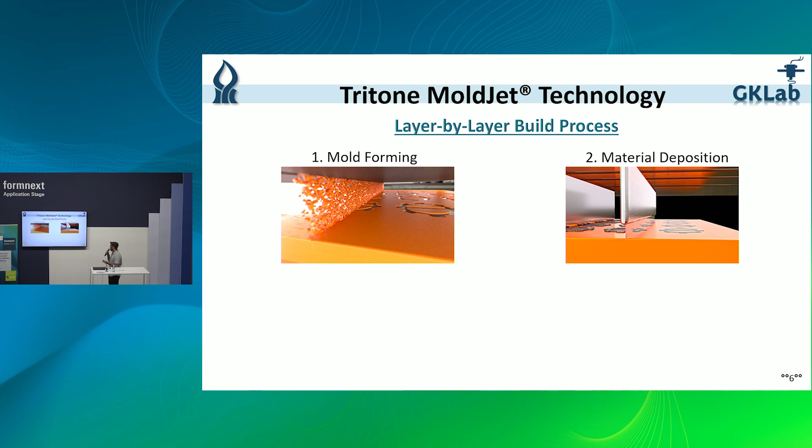Briefly, the layer-by-layer build process includes mold forming, in which a high-resolution print head jets an ultra-thin layer, creating a layer mold. Material deposition, in which a metal paste is applied into the mold cavities. Drying and hardening, in which the build tray goes into a thermal phase, hardening the new layer. And real-time visual inspection, in which a high-resolution camera analyzes the new layer, making sure it conforms to the final model. If it does not, the defective layer is removed, and the system repeats the previous layer without affecting the process. This process repeats layer after layer at an industrial speed.

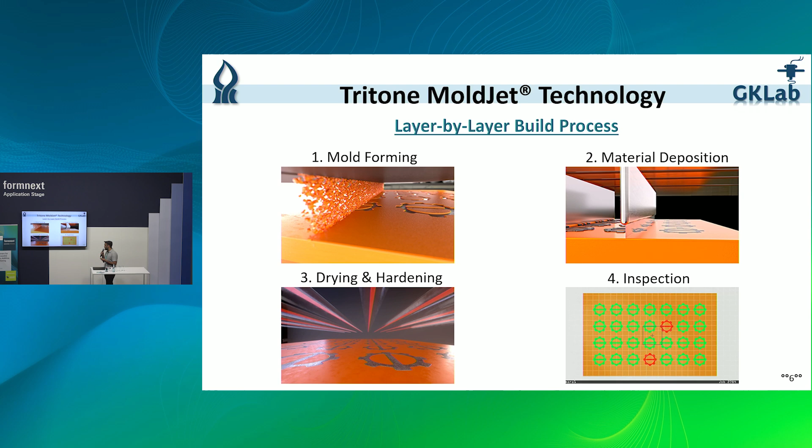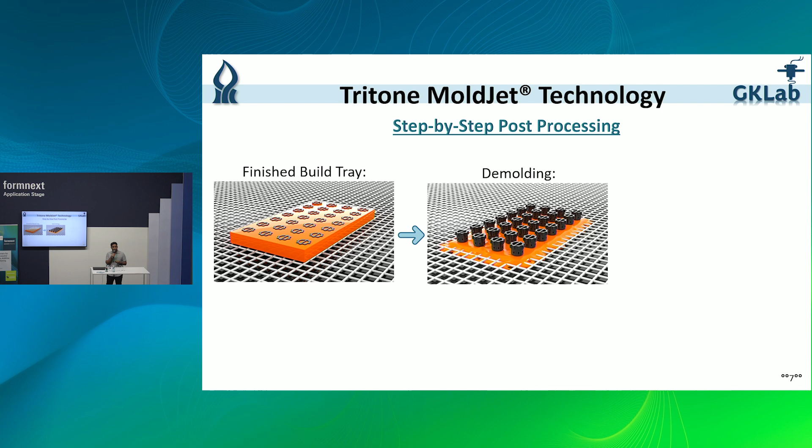After finishing the build process, the finished build trays go into post-processing that includes demolding, using a mold removal solution that chemically dissolves the entire mold material, resulting in clean and robust green parts, and sintering that makes these parts fully functional. For a detailed explanation about the MoldJet technology, you can visit the booth of Tritone at hall number 12.

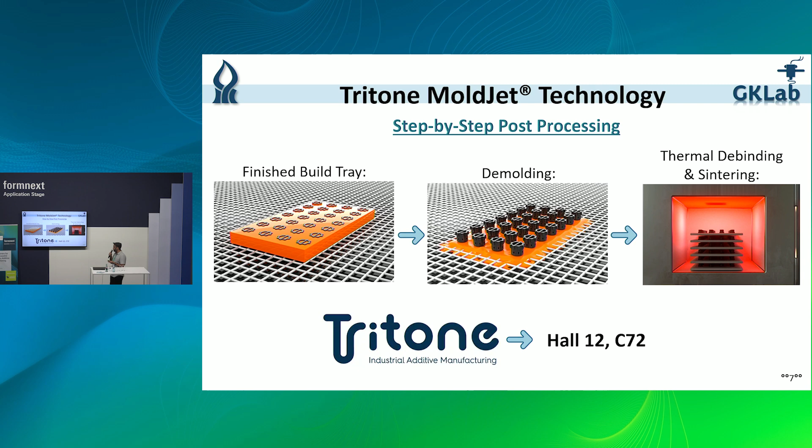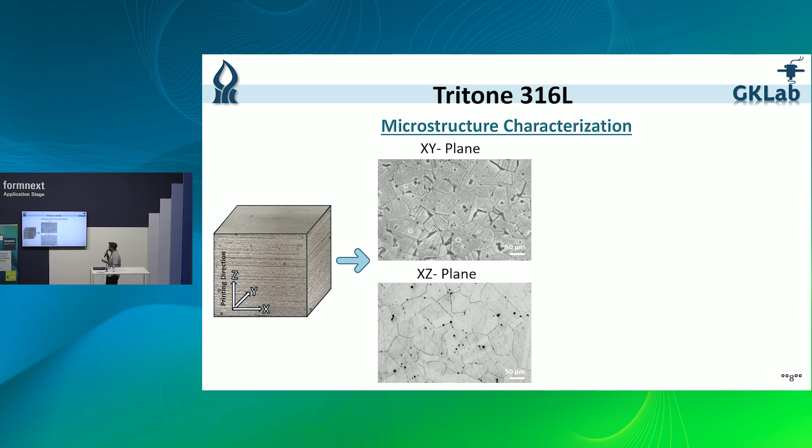The following results were obtained by the characterization of a 316L stainless steel alloy. The microstructural characterization included examination of both the XY and XZ planes of a printed cubic sample in order to examine whether there is dependency on the printing direction. Here we can see microscopic images of these planes that reveal the presence of a primary phase of an austenitic matrix and a secondary phase of ferrite. The presence of these phases is also indicated by an X-ray diffraction analysis of both planes.

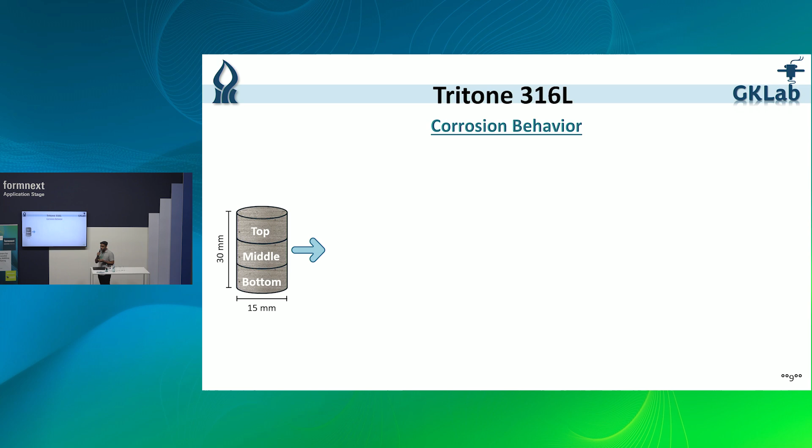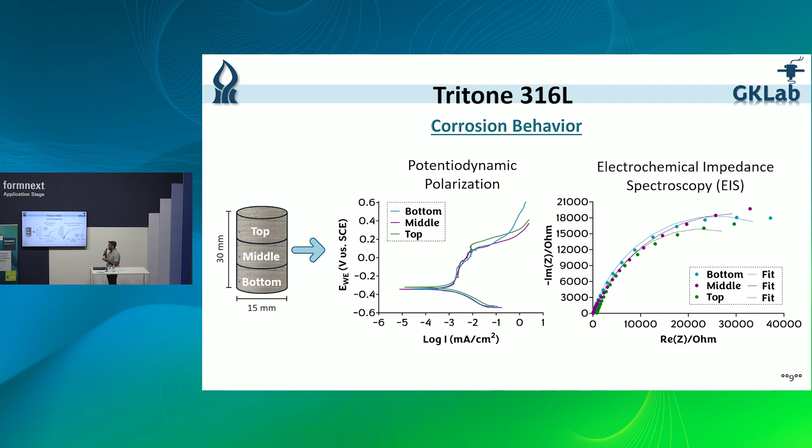As part of the corrosion behavior evaluation, I divided it into 3 areas and examined whether there is consistency between the different areas in terms of corrosion resistance. The tests were conducted in a solution that simulated the physiological environment, PBS. Here we can see the corrosion resistance in terms of potentiodynamic polarization and electrochemical impedance spectroscopy curves. The obtained curves in each plot demonstrate high corrosion resistance and that there are no significant differences between the examined areas.

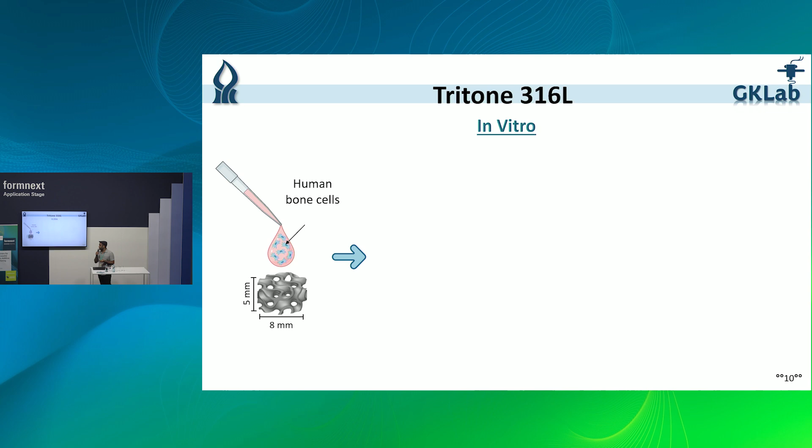The in vitro evaluation included seeding of human bone cells on printed lattice samples followed by incubation for several time periods up to 28 days. At the end of the incubation periods, the bone formation was evaluated using fluorescent staining. Here we can see microscopic images of lattice samples that were incubated for 14 and 21 days. The blue DAPI staining, which represents the cell nuclei, indicates the cells' attachment to the surface of the samples.

The red staining, which represents the calcium deposition, demonstrates how the seeded bone cells deposit calcium and other minerals to initiate the bone tissue. These images indicate cell proliferation and bone formation on the surface of the samples as time progresses, thus proving the samples' biocompatibility.

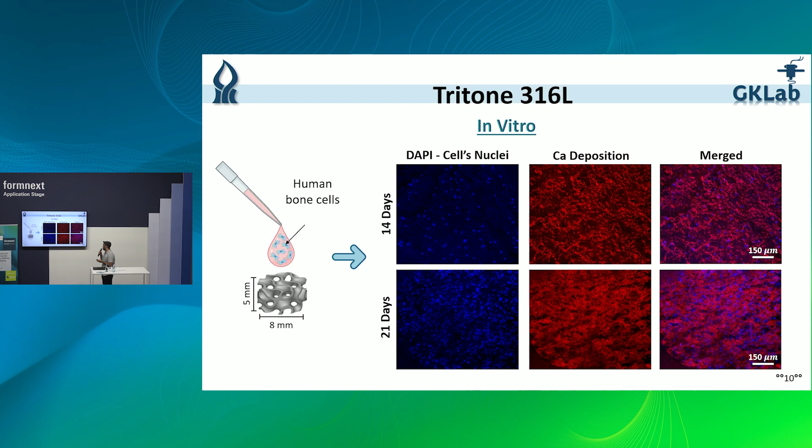In summary, the obtained results demonstrate the isotropy of the examined samples, and their potential to be used as bone reconstruction implants due to their corrosion resistance and biocompatibility.

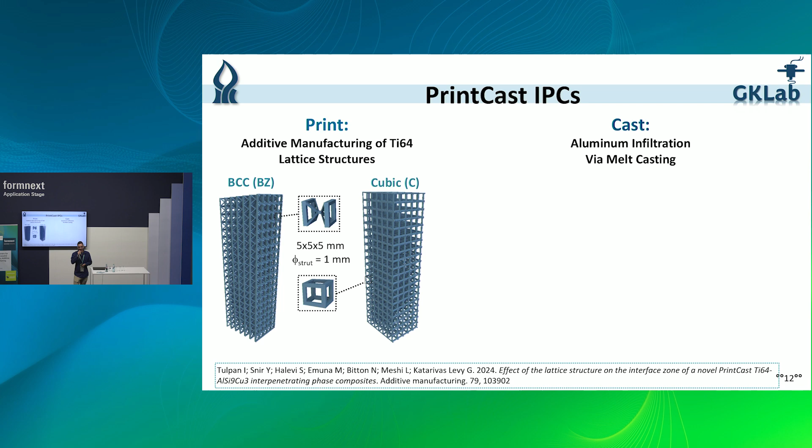First, we 3D printed lattice structures out of a titanium 6-4 alloy. And then we infiltrated the pores of the lattice structure using cast aluminum alloy in a high-temperature environment. The resulting IPCs combine the properties of both constituent materials as well as of the lattice structure.

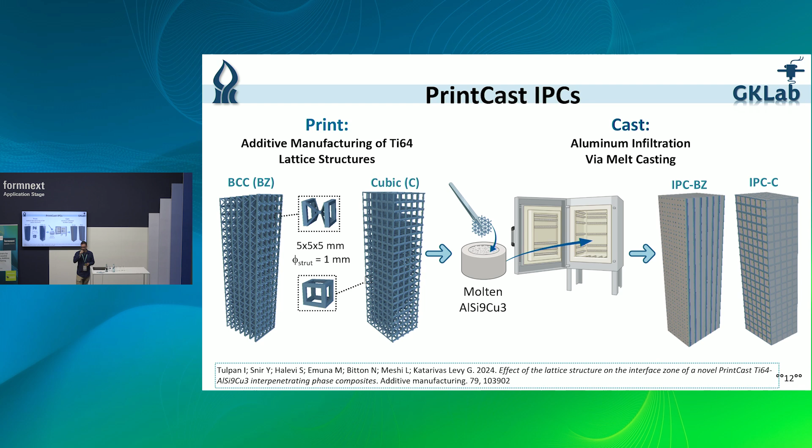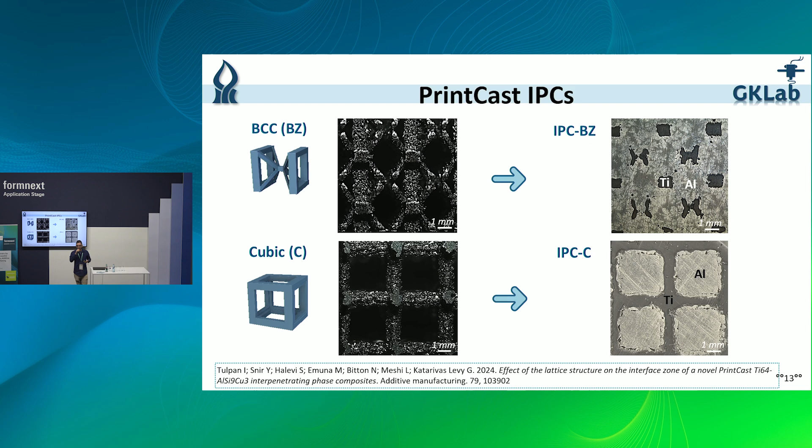Here we can see the actual lattice structures that we printed, and we can see the resulting IPCs after the filling process. In this type of process, there are two main challenges that we overcame. The first challenge is the very act of filling up the pores of the lattice structure, since the aluminum alloy does not flow very well inside the lattice structure. And the second challenge concerns the bond between the aluminum matrix and the titanium lattice structure.

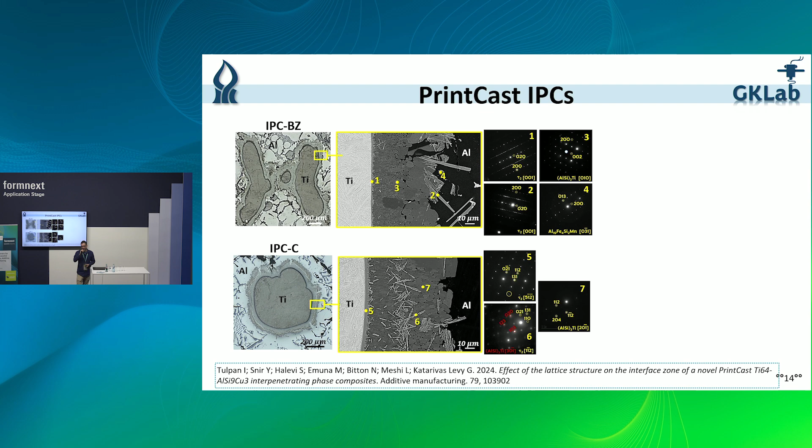Here we can see sections of the IPCs that we produce, and we can see scanning electron microscope images of the titanium lattice on one hand and of the aluminum matrix on the other hand. And we can see that an interface layer had formed in between the two materials, which allows the aluminum to bond to the titanium lattice. We investigated the phases that make up this interface zone using electron diffraction, and we identified a variety of different intermetallic phases that formed during the cooling process.

Interestingly, we see that there was an extra phase that formed in the BCC lattice in the upper area. These polygonal phases form in the aluminum cast alloy whenever it cools down at a slow cooling rate. And since they formed in the BCC lattice but not in the simple cubic, we can understand that the choice of lattice structure affects the formation of these phases.

We can understand that since the BCC lattice structure has a larger surface area than the simple cubic, it prevents the extraction of heat from the area in the vicinity of the interface, since the lattice structure is made out of titanium and it conducts heat very poorly. And this allows for the formation of this extra phase.

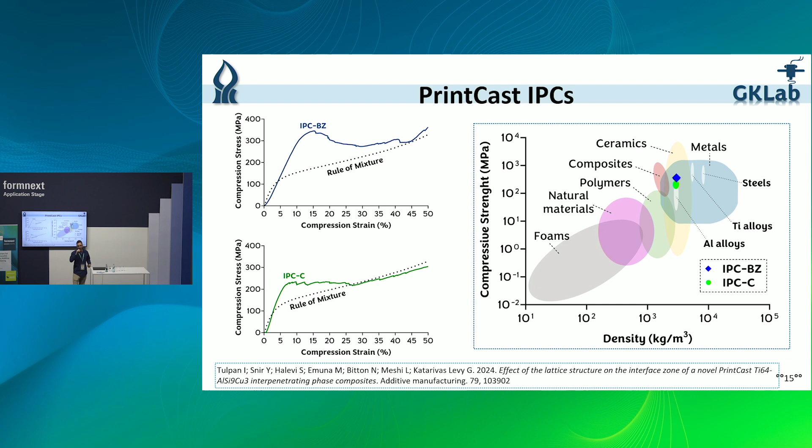We can see here also a comparison between a variety of different material families in the engineering world. And we can see that the IPCs that we produce have a very high strength-to-weight ratio. We can even see that they have a similar strength to titanium alloys, even though they are, for the most part, made out of aluminum.

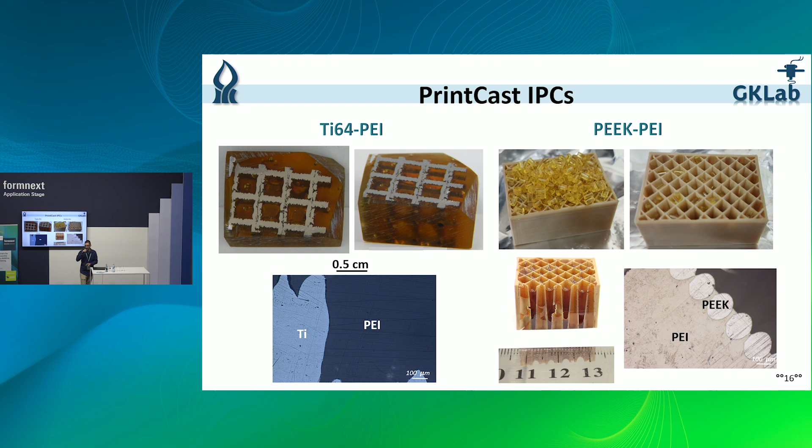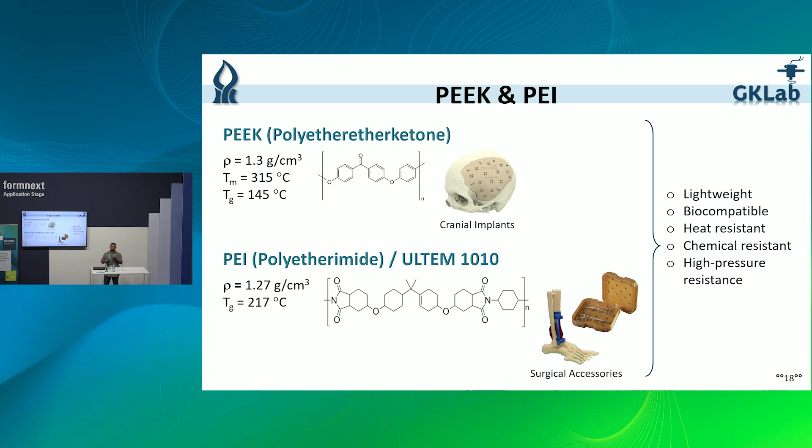Hi everyone. Today I will be presenting my research on high-performance polymers for bone replacement implants. In our lab, we primarily work with two high-performance polymers, PEEK and Ultem 1010. These materials are widely used across industries, from lightweight aerospace and military parts to surgical jigs and tools. These materials have high mechanical and thermal properties, and for that they need specialized equipment to print with them.

To print these polymers, we use a high temperature printer. This printer can reach a printing temperature of 450 degrees Celsius. It is also equipped with a convection heating system that works like a heat gun. It reduces the thermal gradient around the printed parts. This is an open source printer, and most open source printers don't come with preset parameters from the manufacturer, so we need to perform a parameter optimization for each material that we use.

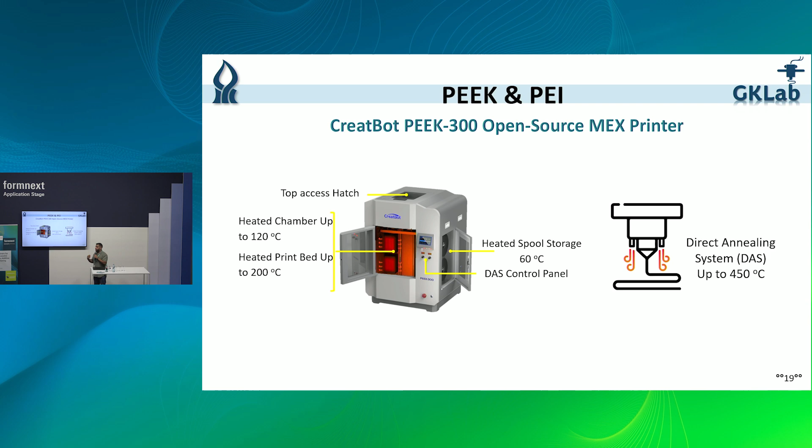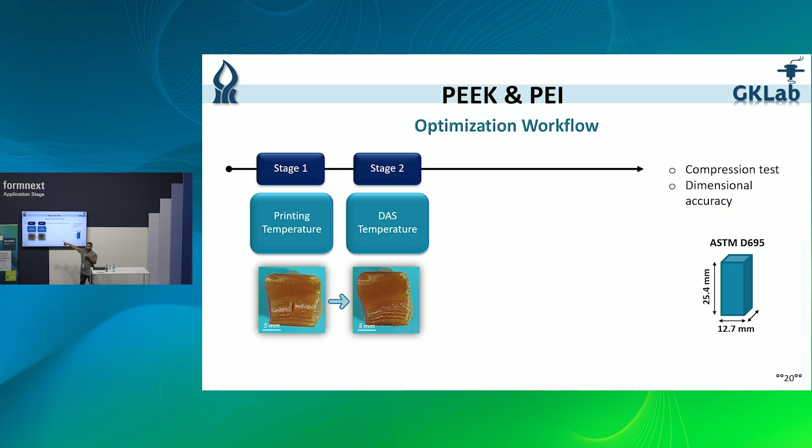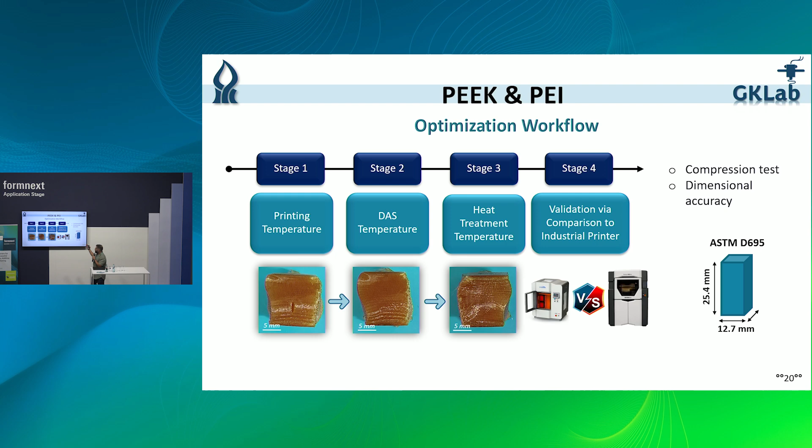For that we conducted an optimization process that is constructed of 4 stages. In the first stage, we optimize the printing temperature. In the second stage, we optimize the DAS, or the convection heating temperature, with the printing temperature from the first stage, then the heat treatment temperature, and finally, we validate our results by comparing our optimized parts with parts manufactured on an industrial grade printer.

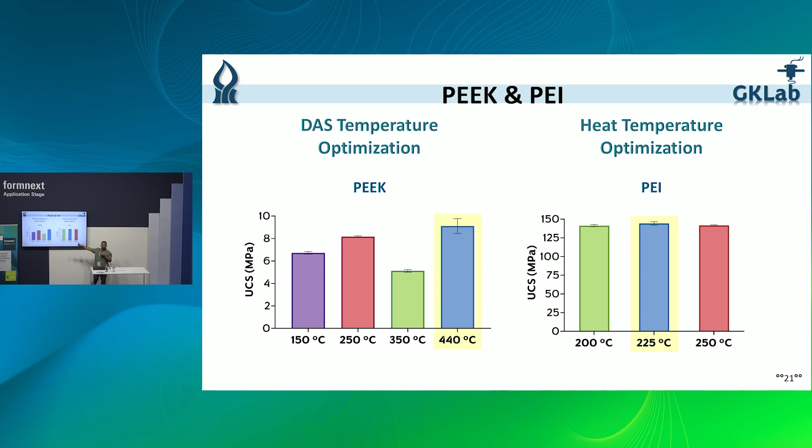Here you can see an example from 2 different stages for each of the polymers. We achieved optimal ultimate compressive stress for a DAS temperature of 440 degrees Celsius for the PEEK, and an optimal ultimate compressive stress at a heat treatment temperature of 225 degrees Celsius.

As we know, in FDM printed parts there is anisotropy, and for the comparison stage we printed 3 different printing orientations and tested their compressive stress. As you can see, the blue graph represents our optimized parts. The red one represents parts manufactured on an industrial printer, the Stratasys Fortus 450 MC. Our optimized parts present comparable results when compared to parts manufactured on an industrial printer.

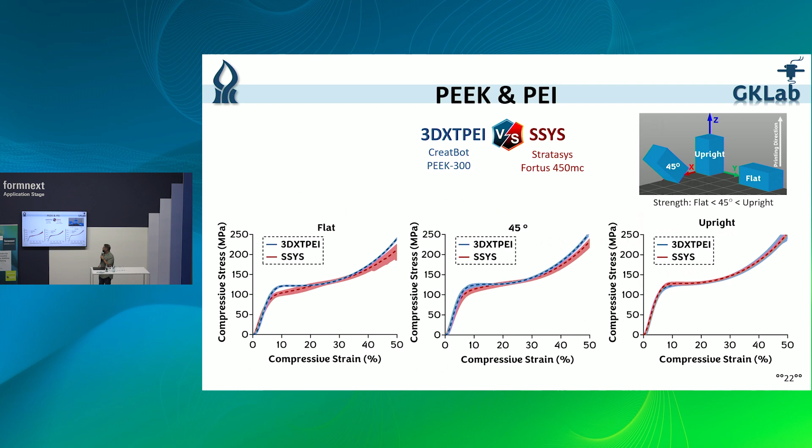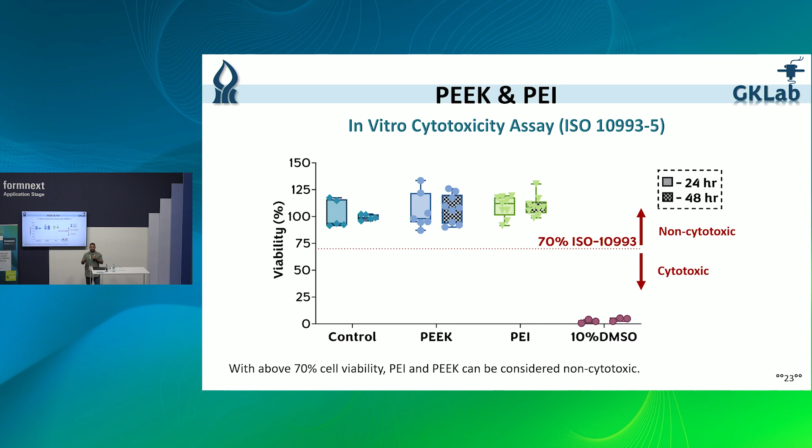As I mentioned earlier, these materials are designated to be used for implants, and this is an example from one of the biocompatibility tests we are performing. This is an in vitro indirect cytotoxicity assessment, and as you can see, the cell viability for both materials is well above 70%, which, according to this standard, shows us that these materials are non-toxic, and shows promising results that these materials can be used for future implants.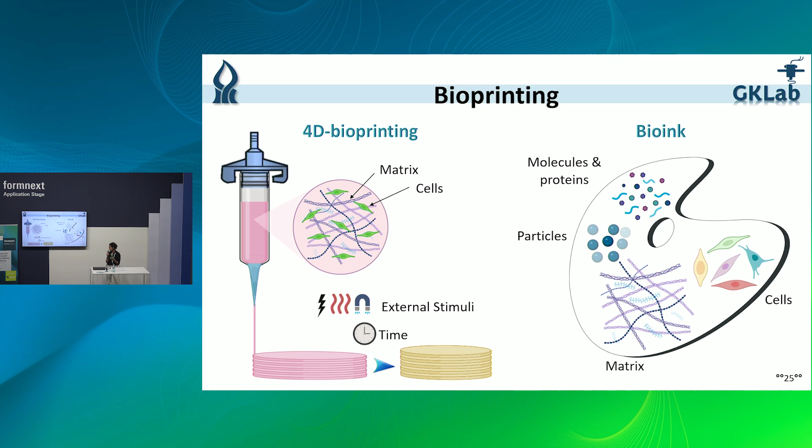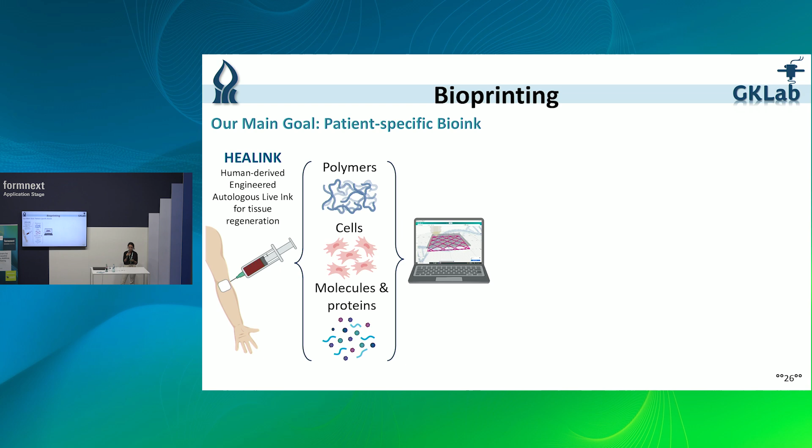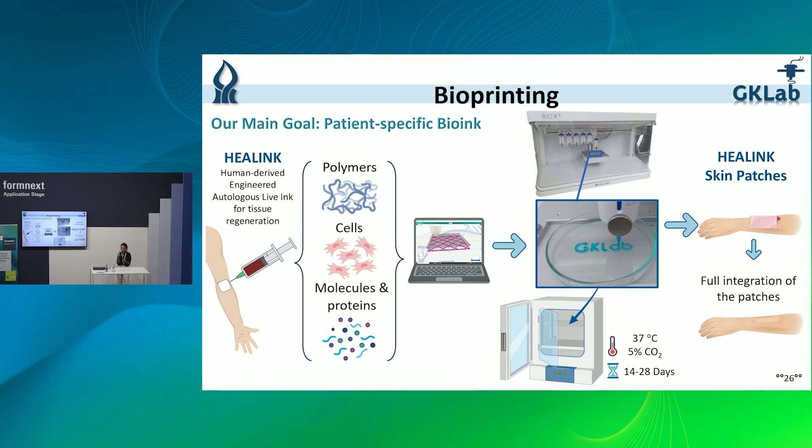Our goal is to create a bioink that is patient-specific. What does that mean? We do that by material selection. We use polymers, cells, and proteins taken from the human body, and we aim to take them from a patient once they need it, and combine them to create HealInk, a human-derived engineered autologous live ink for tissue regeneration. Once the composition and printing parameters are established, we print the model and put it in an incubator for a few weeks. After incubation, we achieve a skin patch that is an initial developed tissue, 100% matched to the patient.

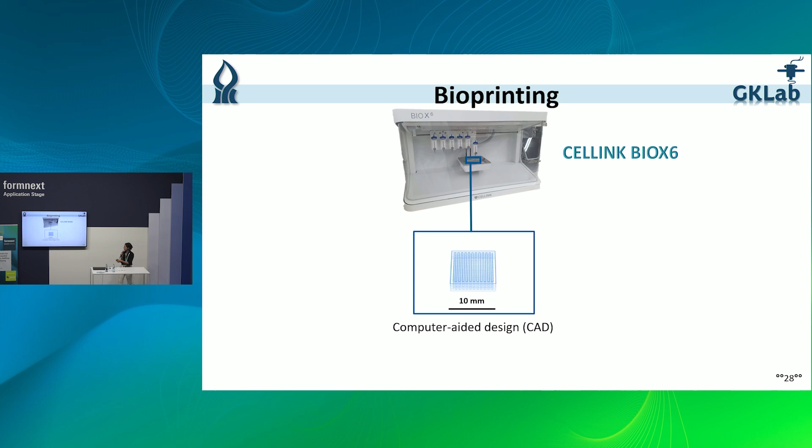For the printing process, we use the Cellink Bio X6 bioprinter. It has several printheads and functions to deposit the materials in a controlled manner. The first function we use is for the bioink scaffold: extrusion-based bioprinting, where we push our bioink through the nozzle using pneumatic pressure. The other function is syringe pump bioprinting, which we use to seed the cells onto the bioink scaffold.

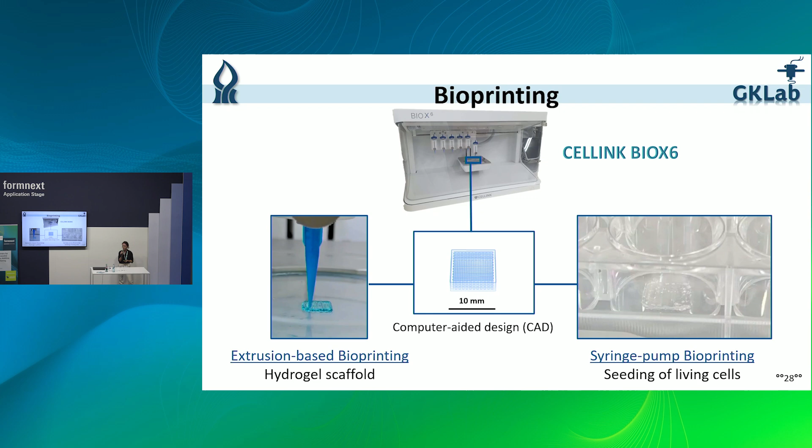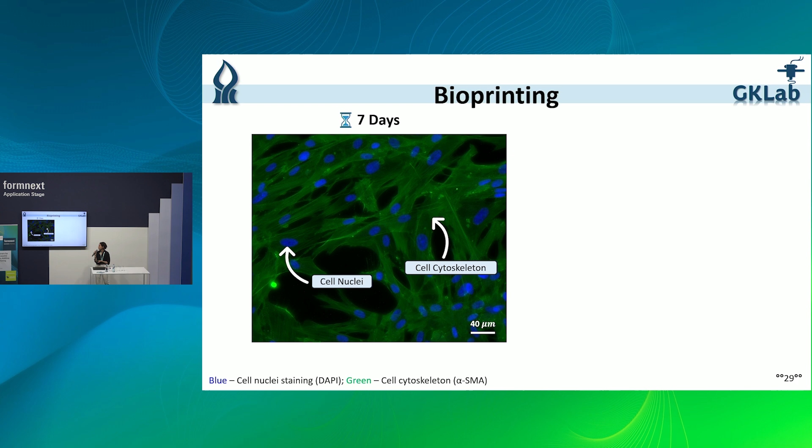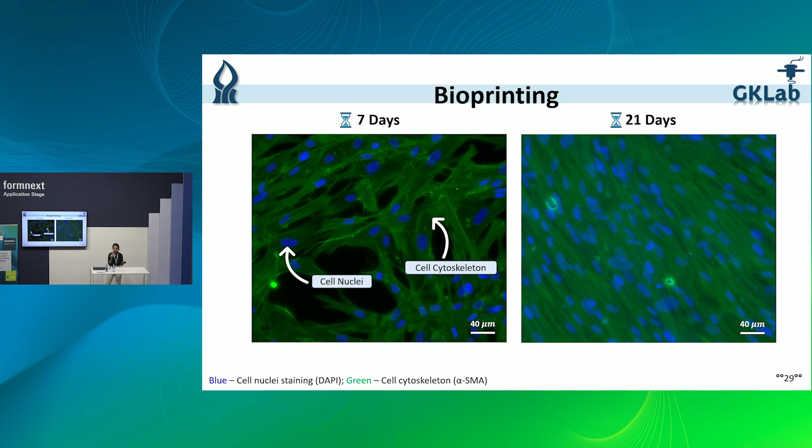Now I'm going to show you microscopic images of our cells after incubation. This is an image of human dermis cells after 7 days of incubation. In blue we see the cell nuclei, and in green the cell cytoskeleton. After 7 days, the cells are alive and well, meaning our bioink is not toxic, as we can assume. After 21 days, the cells have multiplied significantly and create a continuous tissue. So we see great promise for this bioink for skin bioprinting, and in the future for further tissue applications.